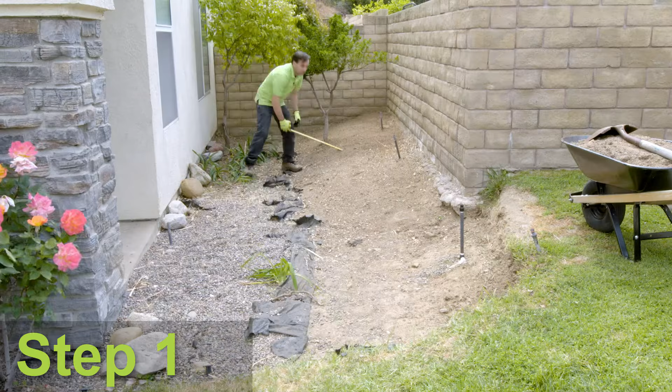Step 1. We will measure the project area to determine how many Dirt Locker components will be required and which Dirt Locker model will be appropriate for this site. Step 2. We will check the area to see if there are any obstacles that we need to work around. Step 3. Based on our measurements and the obstacle review, we will create a layout plan so we know exactly how to configure the Dirt Locker system.

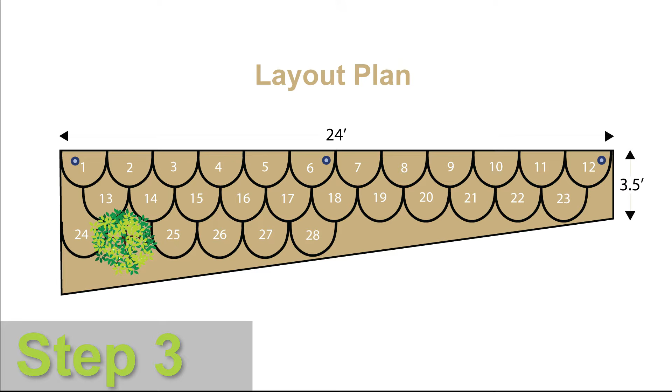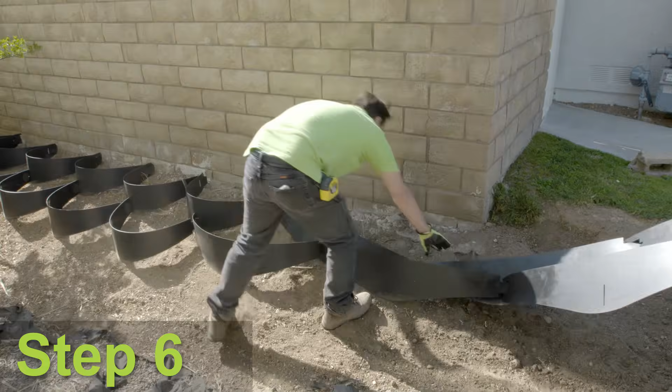Step 4. Choose which side of the Dirt Locker will be showing outward. Step 5. Pre-assemble the whole Dirt Locker system on a flat surface. Step 6. We will pull the assembled Dirt Locker system onto the location and stake it down. Step 7. We will backfill with good planting soil. Step 8. Plant the desired plants and then sit back and admire. Now, let's take a detailed look at each step of the Dirt Locker installation process.

The first thing we need to do for this project is determine how many Dirt Lockers will be required and which Dirt Locker model will be appropriate for the slope we're going to work on. To determine the number of Dirt Lockers needed for any project, you need to first calculate the area of the location. You do this by multiplying the length times the width, which returns the total square footage. For this project, the total is 84 square feet.

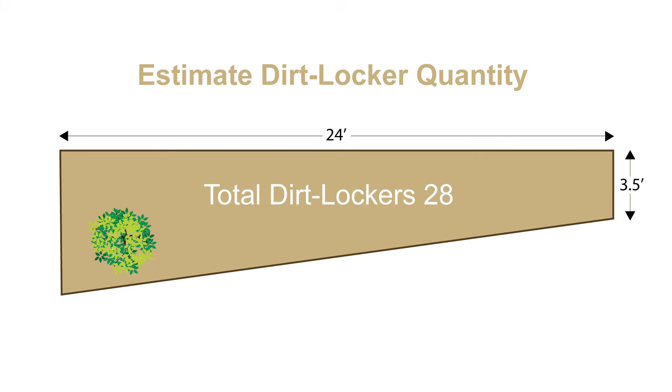In order to determine the Dirt Locker model, you need to calculate the angle of your slope. You can do this easily with a level and a tape measure. Place one end of a 4-foot level on the hillside, with the other end pointing straight down the hill. Measure the height from the bottom of the level to the ground. Make sure that the level is completely level when you take this measurement. Also, make sure you're measuring from the bottom back end of the level.

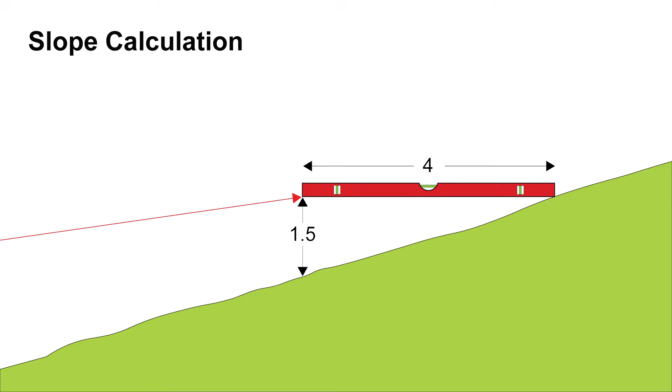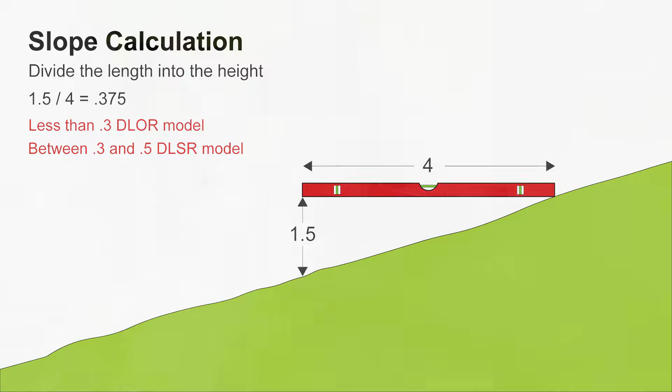Now, divide the length of the level, which is 4 feet, into the height measurement, which in this case is 1.5 feet. If the calculation is less than 0.3, use the Dirt Locker original model. If the calculation is between 0.3 and 0.5, use the Dirt Locker Senior model. For this project, we will use the Dirt Locker Senior model.

Well, we're almost ready to assemble and install the Dirt Lockers, but we're going to take a quick survey of the area to make sure we don't run into any problems. So in this case, we've got a couple pre-existing things such as these sprinklers. We also have a tree over here.

Well, one of the great things about the Dirt Locker is how flexible it is and how easy it is to maneuver around obstacles such as these. So we're not going to have to trench, we're not going to have to dig out anything or move anything. We're going to just work right around them using the flexible nature of the Dirt Locker and how easy it is to install.

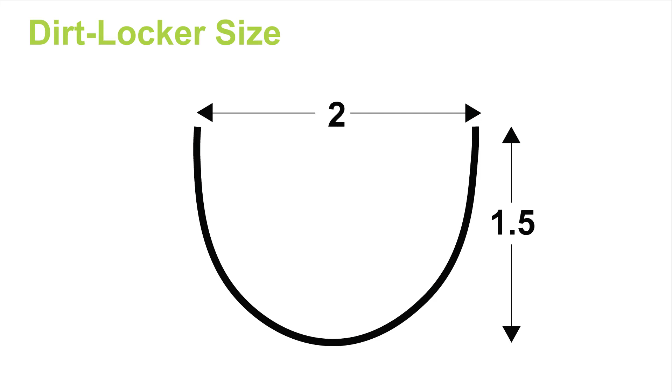Okay, we're ready to assemble the units. Now we just need to determine what the layout is going to look like. Each Dirt Locker, when assembled, is 2 feet wide by 1.5 foot deep. Since this location is 24 feet wide, we will lay out 12 Dirt Lockers for the first row at the top of the slope.

The depth of this location is roughly 3.5 feet, so we will lay out 2 rows of Dirt Lockers. Since the back of this location is wider, we will add a third row with 5 Dirt Lockers to compensate. We will also skip one of the Dirt Lockers to allow for the existing tree.

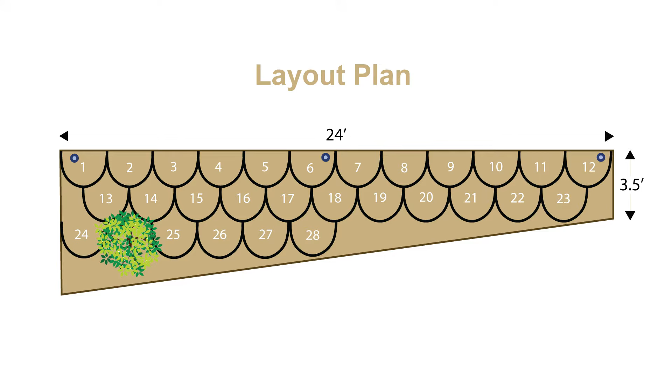Well, we're ready to assemble. We just need to make a quick decision about what surface we want to be facing us when the garden's done. So the Dirt Locker has 2 surfaces, a gloss finish and a matte finish. Decide which finish you would like to show and have that finish facing up as you assemble the Dirt Lockers.

In order to better demonstrate how the Dirt Locker system is assembled, we're going to lay out all the components on the homeowner's sidewalk, and then we will connect them together without using any special tools or fasteners. Typically, you will assemble the Dirt Locker system at the bottom or top of the hill or another convenient location.

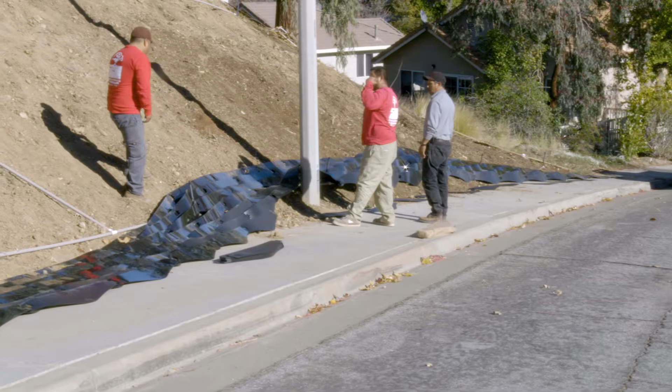Before we begin assembling, let's take a look at the anatomy of a dirt locker. The top of the dirt locker is the straight edge and the bottom is the curved edge. The curved edge is what compensates for the slope of the hill and allows the straight edge to be level once installed. The cell tab and the cell slot allow us to connect many cells in one row. Remember, we have 12 cells in the first row of this project.

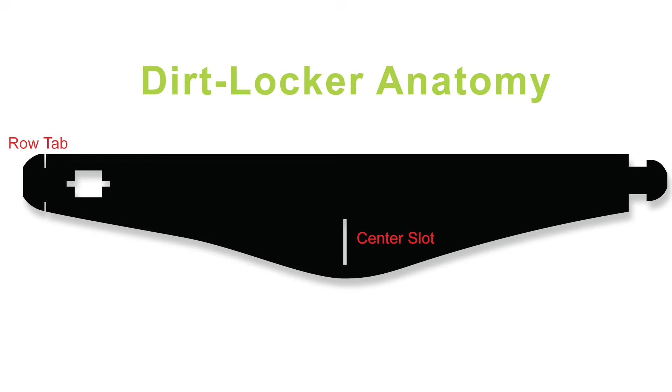We will connect them by inserting the cell tab of the first unit into the cell slot of the second unit, and so on. The row tab and center slot allow us to add the next row of cells by connecting the row tab of a new dirt locker into the center slot of the previous row above. Let's see the full assembly from the beginning.

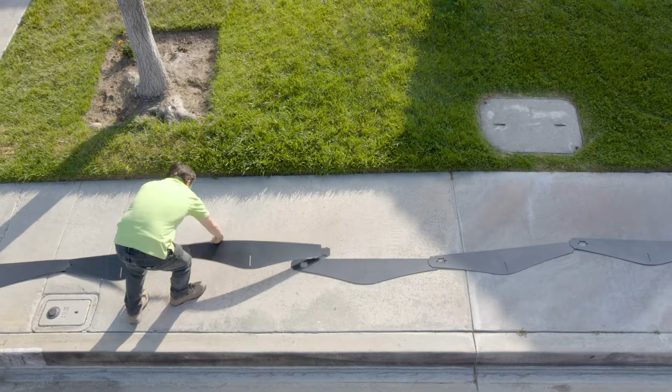Following our layout plan, we begin by connecting our first row of 12 cells together. We always start with the top row first. Make sure you orient all of the units in the same direction with the curved edge pointing down and the flat edge pointing up. Also, make sure your chosen finish, flat or glossy, is facing up.

Notice that turning the dirt locker with a cell tab 90 degrees makes it much easier to insert in the cell slot. Once inserted, return it to its former position and move on to the next cell. Repeat this process until all the cells in the first row are connected together. Now we will lay out the second row of dirt lockers, which according to our layout plan has 11 cells. Position the row tabs towards the center slots of the first row.

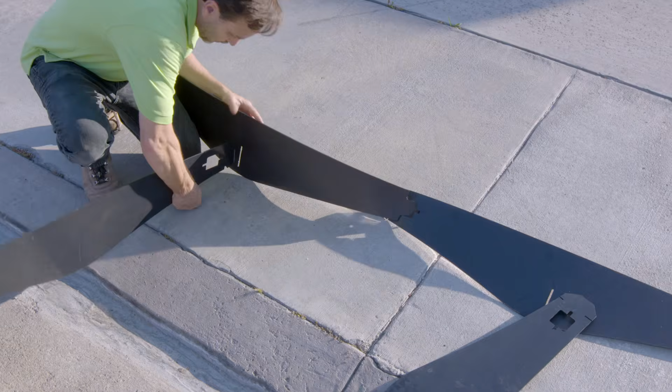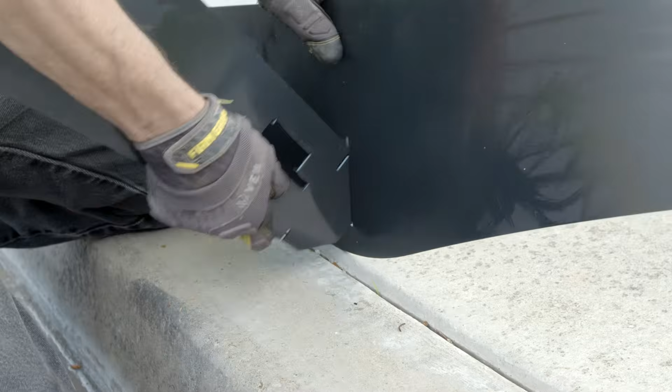We are now ready to connect the second row. With the flat edge pointing up and the curved edge pointing down, insert the row tab of the new dirt locker into the center slot. The best way to do this is by tipping the back of the unit up and then inserting it into the slot. There are two channels on the row tab. The channel on top is deeper than the bottom channel. Pop the top channel in first, then push down on the tab so the bottom channel is also seated into the center slot.

Continue building the second row of cells by attaching the row tabs of the dirt lockers in the second row to the center slots of the dirt lockers in the first row. The dirt lockers are designed to fit together snugly, so connecting the row tabs for the first time may take a little manipulation in the beginning, but you will get the hang of it very quickly.

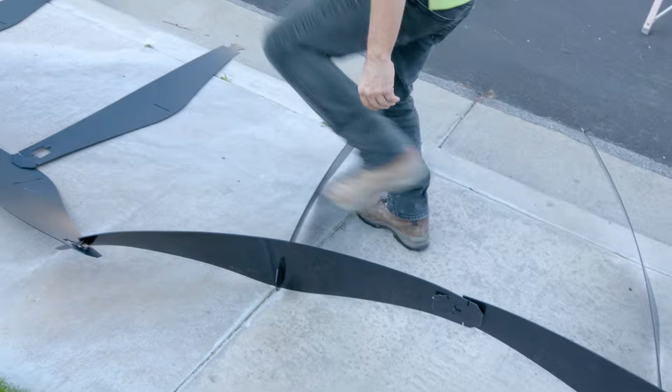The connection between the row tab and center slot is designed to be extremely strong. You won't have to worry about it coming apart. The strength of this connection is what allows us to add as many rows as needed on any project, including hillsides with much steeper slopes.

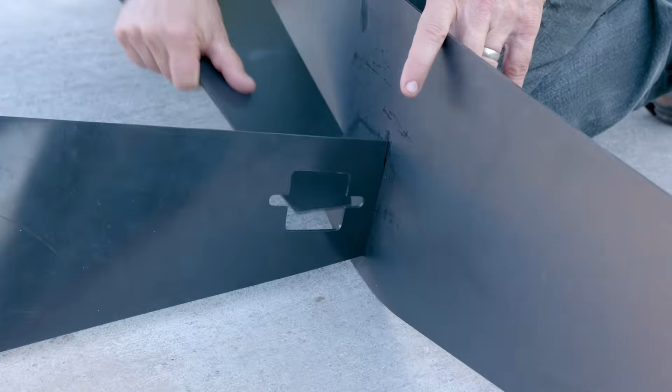Return again to the first cell of the first row. We will now connect the cell tab of the first dirt locker to the cell slot of the second dirt locker in the second row. Complete the rest of the second row by connecting all the cell tabs to the neighboring dirt locker's cell slot. Remember that turning the dirt locker cell tab 90 degrees makes it much easier to attach. Using these basic assembly principles, you will be able to build any size or shape dirt locker system with as many cells and rows as needed for your particular project.

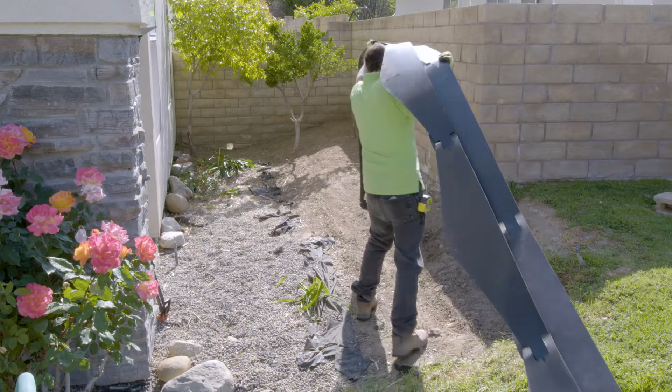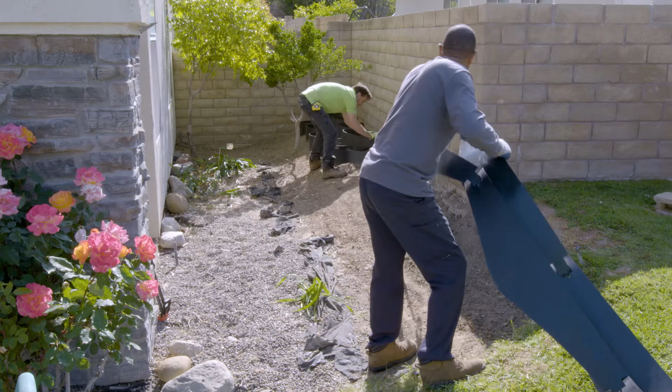Now that we've assembled all of the dirt lockers on a flat surface, we're ready to pull the entire system onto the location. As we are pulling the system to the location, we leave it folded accordion style. This makes it extremely easy to maneuver into place. Once the top row is in place, space the dirt lockers evenly so the opening of each unit is 2 feet apart. You can use a fixed measuring device, such as a 2x4 cut to length. On this project, we used large nails and pre-placed them 2 feet apart.

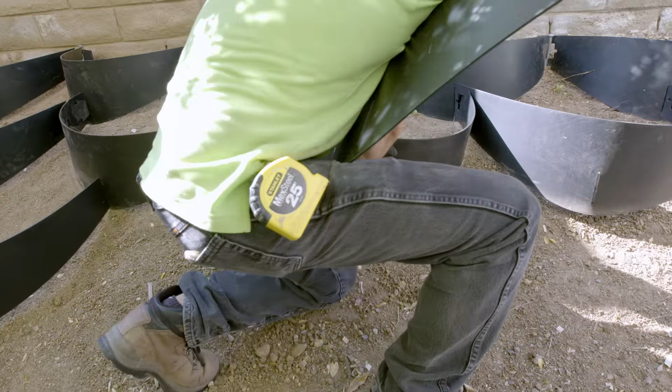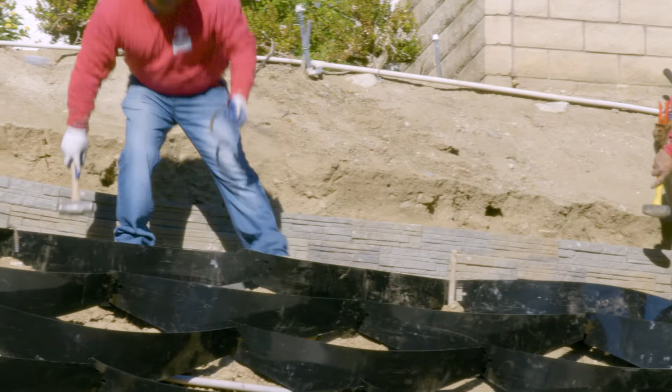Notice that we did not pre-assemble the third row of dirt lockers. We did this so we could work around the tree. The dirt locker system is extremely flexible. You can add or subtract dirt lockers at any time throughout the process. On larger projects, we recommend having one person stationed every 5th or 6th dirt locker when pulling it up the hill. It is also recommended that you use common irrigation J stakes to stake off the top row of each junction, as well as staking down the end units that are not attached to other dirt lockers.

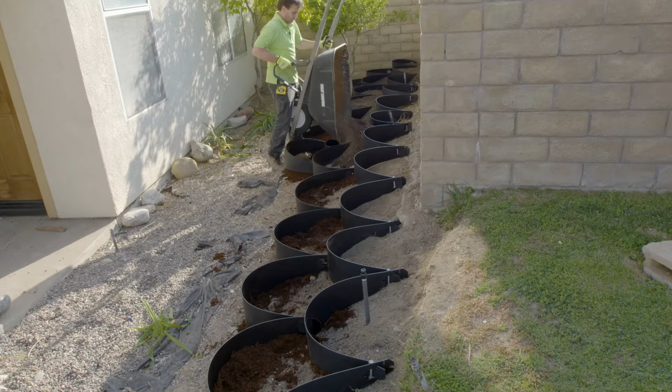Now that the Dirt Locker system has been pulled into place and staked off, we're ready to backfill with good soil and start the planting process. Because there is a brick wall at the top of this location, the soil is brought up from the bottom. However, on larger jobs, and where possible, it is better to backfill from the top of the hill.

So the Dirt Locker veteran knows that each hillside and slope is a little bit different. So it's hard to get it exactly lined up with the bottom of these units. So you can see here there's a little bit of a gap. And when we backfill with soil and we start watering, some of that nice soil is going to want to leach out and run away.

So one way we've found to stop that and to keep the soil in place is just to put a little bit of mulch down here. Not a lot. And it will just work as a filter to hold the soil in place and let any excess water run through, like during our heavy rain periods.

As you can see, the Dirt Locker system, when it's in place, is easy to walk on and maneuver into. And that's because of its design and how rigid this material is. I mean, it's flexible, yet it's very, very strong. And one of the great benefits of this product is being able to walk on a sloped terrain.